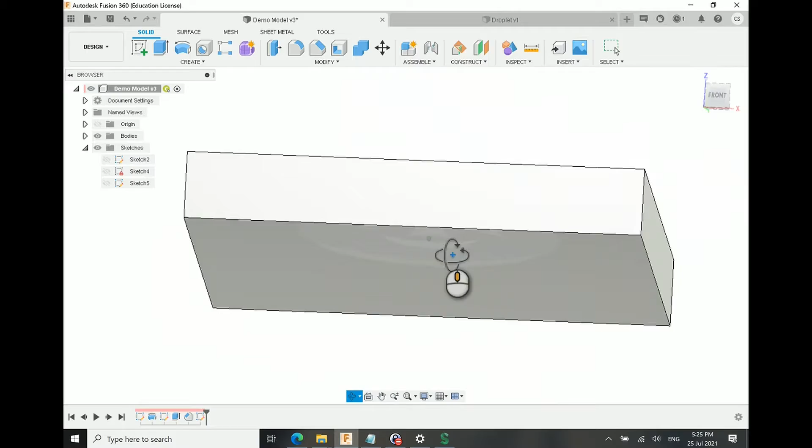This video will go through the complete process of going from a Fusion 360 CAD model to a finished part that you can hold in your hand using the Tormach xsTECH router. So I'll be going through how you create the toolpath in the Fusion 360 Manufacturing Workspace, how you go from those toolpaths to a NC file, so the G code, and then how you load that G code into the

Tormach xsTECH, and then how you set up the machine, like turning it on, setting the work offset, how you install tools, stuff like that. And then going to how you start your program, cycle start. And then also I'll be going through how you do a tool change between two operations, which is something that I have not seen other videos cover. And then I'll be going through some debugging too. So I ran into some problem and I showed how I tried to figure out what's the problem and how to fix it in the code.

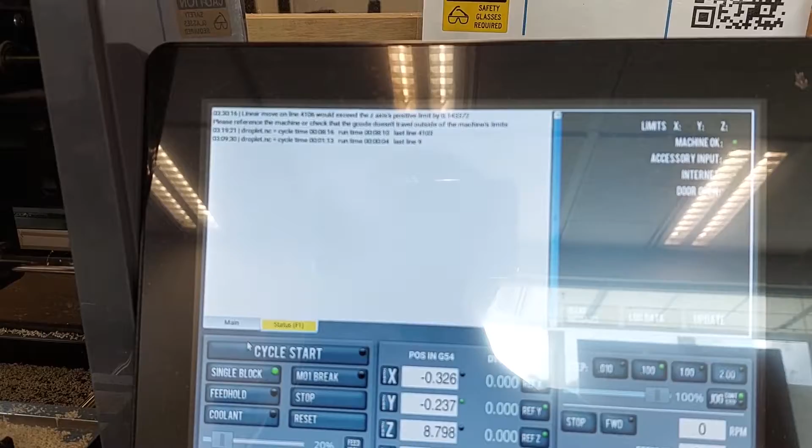And in this video, I'll be kind of focusing on how to run the machine conservatively. I remember when I first started, my top concern was that I'm gonna crash the machine because I'm still really green about the whole process, and I'm not sure when I press cycle start how the machine is gonna move, and I just always felt unsure, so I hope that this video will help make that easier.

This video is quite long because I want the video to cover the entire process, and this is something that I wanted to have when I started, but I couldn't find. But it's likely that you already know some or most of the stuff that's covered in this video, so do skip around, and everything is timestamped, so I hope it will be easy for you to navigate this video.

This is the part that we're gonna make. It's meant to look like the surface of water when some droplet drops onto it, so I have this wavy pattern. And I basically designed this as a demo piece, and it's good because you kind of need two milling tools to make this shape.

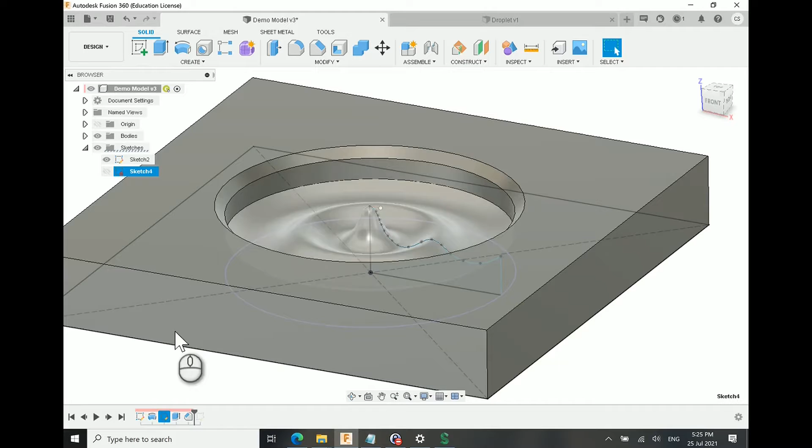Going through the design very quickly. So I'm in the design workspace of Fusion 360. So the first thing I did was to draw a half of the cross section of the part that I'm going to make, so just this wavy pattern, and then I revolve it around to get the solid. Then I drew a sketch of the outer square of the part, extrude that, and then lastly I created a chamfer on the edge here. And there's another sketch here that will be used later in the manufacturing workspace, where I use this sketch to confine the toolpath, but more details on this later.

And so in Fusion 360, once you're done with the design in the design workspace, and you want to make it with a CNC or other processes, then you go to the workspace menu on the top left corner here and click manufacture. So here is the manufacturing workspace. Make sure you are in the milling tab and not the other ones.

On the left here, for example, in the model folder, you can still see the model you're trying to create, and you can still see the individual sketches that you made in the design workspace. And this is useful sometimes because, for example, if I want to confine some toolpath within some geometry, then I can either select it on the model itself, or I can select the sketch itself, which would be easier sometimes. So I'll hide the sketch.

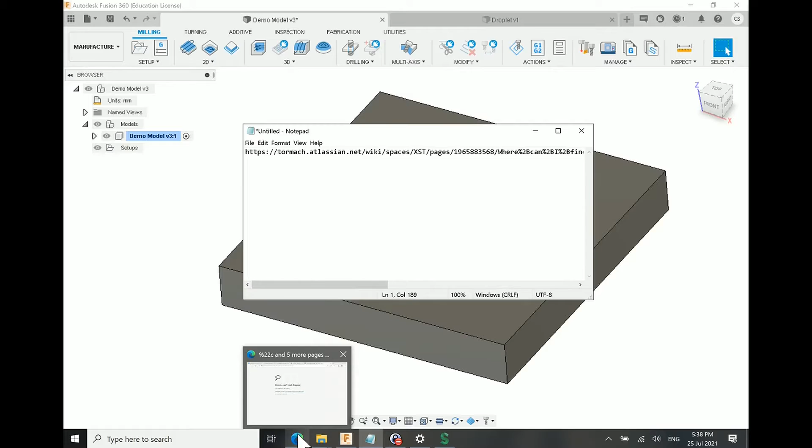Okay, so before we start, we have to import the tool libraries of the xsTECH and also the machine definition. The tool library and machine definition can be downloaded from this link, which will be in the description. So this is the link where we can find the tool library and the machine definition. It's kind of hidden in this weird Q&A section. I don't know why Tormach makes it difficult to find this. So download this folder, and this file.

And once you download, go back to Fusion. And in Fusion, first we'll import the tool library. So go to tool library. Once the page finished loading, you see something like this. Yours will probably look different because it depends on what you have open and what you used before. So on the left, go to local and right click on local, and then press import libraries. And then this window will pop out, and just go find your tool library folder.

So in my case, the tool library is in my download folder, and just press this and click open. But I've already imported it before, so I'm not gonna press open here. And once you're done, you should see this tool library under the local folder, which is the xsTECH Fusion tool library, and it will include the definition of the tools for all the tools that came with the xsTECH. And then now you close this window.

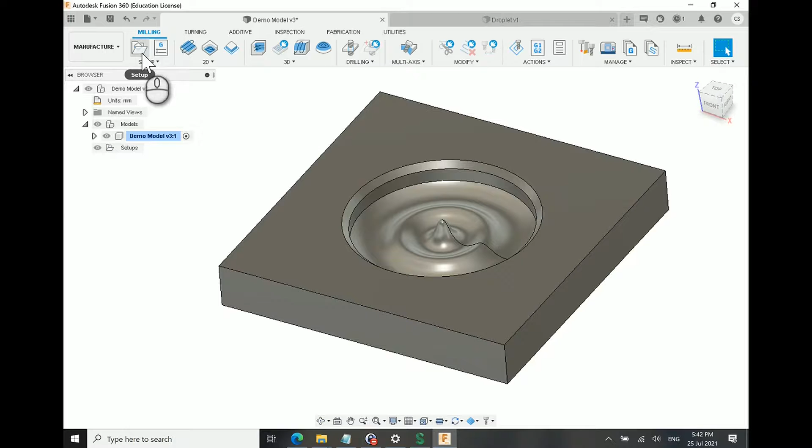Now that we have imported the tool library and the machine definition, we'll start working on the toolpath. The first thing I would do is to create a setup. Go to the top left corner and press the setup button. And then the first thing to do is to select your machine. So go to select, and then go find where you imported the xsTECH router machine definition. So in local, press this and then click select. And next thing is make sure your operation is milling, and then there's a few more things here, but we'll first go to the stock tab.

So in the stock tab, you are telling Fusion 360 what's the size of your stock. So by default, it's in the relative size mode, and it's adding a bit of extra stock. If you see the yellow highlights, it's what the stock looks like in Fusion 360. So in this case, by default, it added 1 millimeter of extra stock on the side and 1 millimeter on the top. But for our case, we just want to mill out the cavity here, and we're not actually going to make the outside profile. So in this case, I can just do relative size box, but the offsets will be 0.

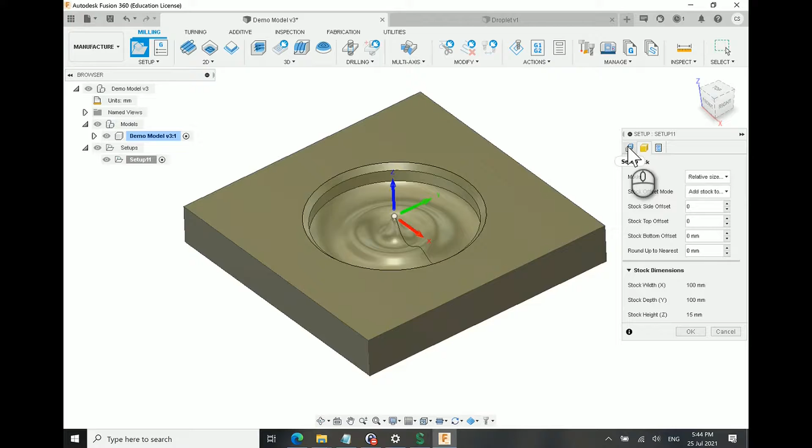And make sure you define the stock accurately. For example, if you want to mill out the outside profile, then you want to make sure the stock definition is correct. Otherwise, the machine might try to move really quickly at some places where it thinks there's no stock. But in reality, if there's actually stock over there, then it's going to be a lot of load on the tool, and you might break the tool. And going back to the setup, now our stock, you can see, is completely aligned. It's almost exactly the same size as our part. And then go back to the setup tab.

Next, we have to define the work coordinate system. The first thing is the orientation. So for the xsTECH, the vertical axis is the Z, the left and right axis is the X, and the forward and backward axis is the Y. So in our case, we do want to clamp the piece in this orientation, so by default, this one is correct. But for example, if we want to clamp the piece vertically on the table, for example to drill some holes on the side here, then what you do is redefine this orientation.

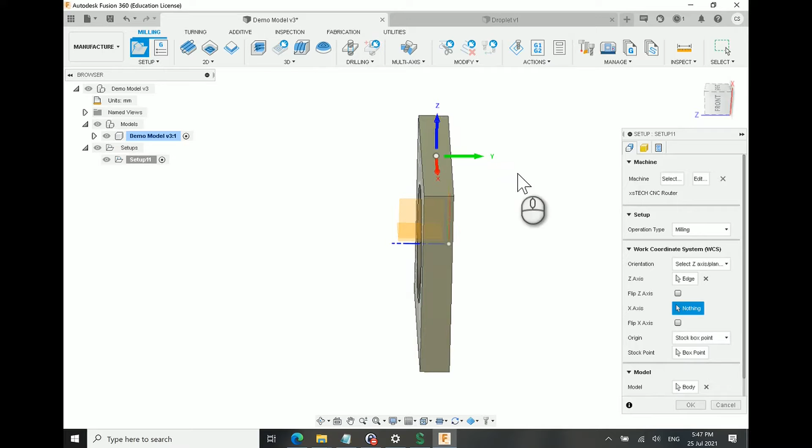By default, it's following the same orientation as your model. So in your design workspace, you have this XYZ here, so it's following that. But you can actually do whatever you want. So for example, if I want to mount the piece vertically sideways like this, then I can choose this option, select the plane and x-axis, and the first thing you choose is your z-axis, and then your x. For example, if I want my x to be the left and right from this orientation, I press here, and I can flip it, and then I've redefined the orientation of my work coordinate system. But in my case, I just want to keep the same orientation as the model.

Next, we have to choose where the origin of the work coordinate system is, and by default, it put the origin at the center of the top of the stock, and this will work fine for us.

But in other applications, you might want to put it elsewhere or in some predefined point that you have designed, put in the design workspace. So there's a lot of flexibility in this. But in our case, I want it here.

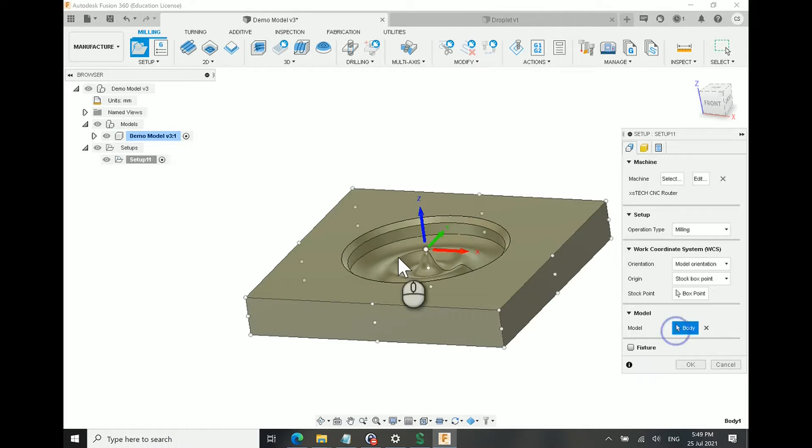And next is model, basically telling Fusion 360 which part you are actually trying to machine out. For example, if you have a component with multiple bodies, but you only want to mill out one body, then here you would choose this body. But since I only have one body, I'm fine with this. And so I can press OK now.

So now at the toolbar, there's a bunch of operations that I can do to cut away material from the stock. So the first thing I want to do is just use a flat bottom end mill to clear most of the material in this cavity away. And I will use a pocket clearing toolpath. I could also use others, but pocket clearing will work fine here.

So first thing you do is select the tool. So click select. Then go to your local folder and choose the tool library that we imported. In this case, I'm gonna choose this tool, which is just a simple flat end mill with product ID 39163, and then click select.

So once you have selected your tool, there are many options and settings that you can play with for this operation. In the first tab, you have your tool that we just selected, and then there's the feed and speed. Feed is basically how fast your tool is moving left and right, forward, backwards, stuff like that. And speed is, roughly speaking, how fast the tool is rotating.

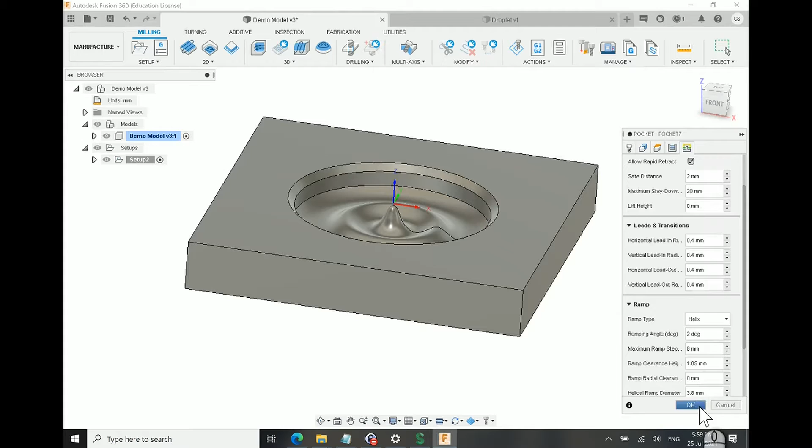And linking, again, we're gonna leave as default. Then I'm gonna press OK. And now it will be calculating the toolpath. So here is the toolpath. You can see the green, blue and red lines, and you can see the tool moving.

If you highlight your operation and press simulate, you can actually see the toolpath, and you can increase the speed of the simulation by holding here. Remember that the speed the tool is moving is not real time, so you can't judge whether a toolpath is too quick or too slow based on this animation. It's just showing you where the tool will go. So you just go through this and see if it's okay.

Usually my strategy is, especially at first when you have so many settings, it's often quite intimidating because you don't know whether you're going to do something wrong. But I find that you can just press OK first and then look at the simulation, and if the simulation looks okay, then usually it won't be too bad. Especially in a material like wood, you have a lot of margin for error.

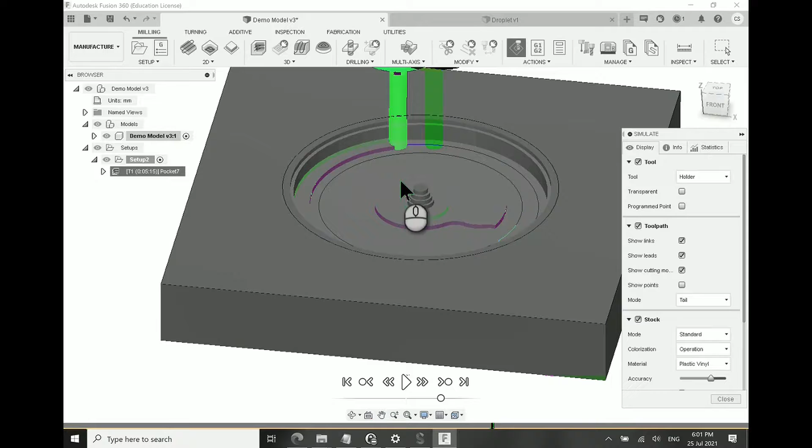So if the toolpath looks okay, meaning it's not suddenly making some really deep cuts, or the tool is simply at the wrong place, then it'll be okay. The simulation looks good, so I can go back by pressing close.

The next thing I want to do is clean up this wall here. After the first operation, I left some material on the side here, and I want to clean that up. For this operation, I'm going to use the 2D contour toolpath. So go to 2D and press 2D contour, or you can just press here directly. And first select the tool.

By default, it's just going to use your previous tool. In this case, I do want to use the previous tool, so I don't have to reselect it. And for feeds and speeds, it's also going to inherit your settings from before. For example, the cutting feed rate is 1500 that we set just now. But in this case, because I'm trying to use the tool to clean up this whole face in one pass, a lot of the tool is engaged with the workpiece. So I want to go a bit slower for this pass. So I'm going to change the feed rate back to 1000 millimeters per minute.

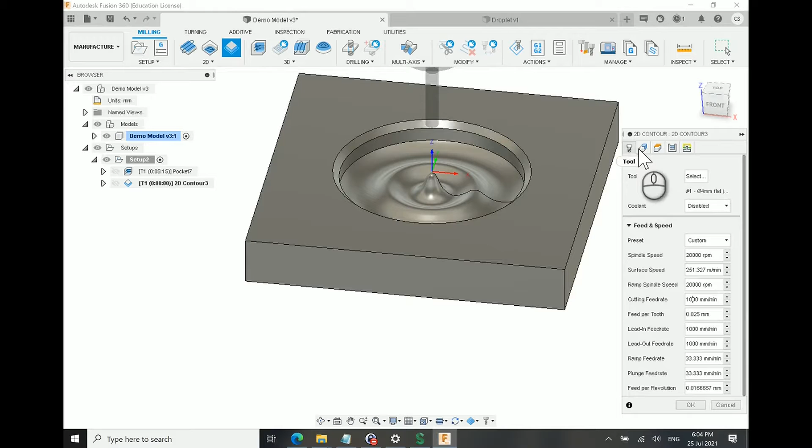The rest, and then the geometry. So basically defining which 2D contour I'm going along. So I'm pressing the bottom of this face. And you can see the arrow here. The arrow right now is inside the contour, meaning the tool will be inside this contour, which is what we want. Sometimes this might be wrong. You can just press on the arrow and it'll mill on the outside. But the default was correct, so I'm going to leave it as it is.

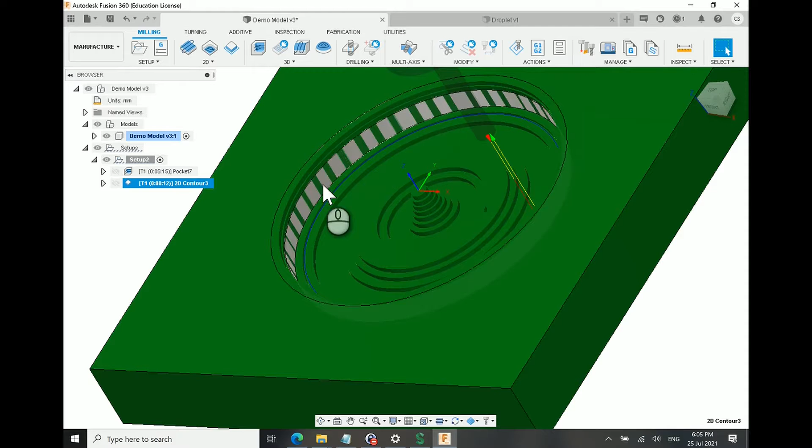The other stuff I can leave as default. Height I can leave as default. And then passes, you can just leave as default, press OK, and then simulate and see whether it looks okay. So you can see this toolpath is very simple. It just goes through in one pass, and on this stock you can see the green is basically your stock, and if you see some gray, you're seeing your model, and when you see this kind of pattern, it's showing that your stock, at least at this face, is matching with the model itself.

If we go to simulate, and if we slow it down, you can see it going down and then just going for one pass. So again, if I'm not very confident with my settings, I can just go to simulate and carefully look at this whole pass, and I can see that the whole time it's not cutting some ridiculous slot or having a lot of engagement. And then I feel confident that this will be okay. Okay, and then we can close this.

So now with the flat end mill, we have roughed out most of the material, and we'll now use a ball end mill to smooth out these surfaces so that it actually looks like our design. For smoothing out this geometry, we'll use the spiral toolpath. And then we want to use the ball end mill, so we have to select a new tool. Again, go to your xsTECH Fusion tool library under local, and you can go find your ball end mill.

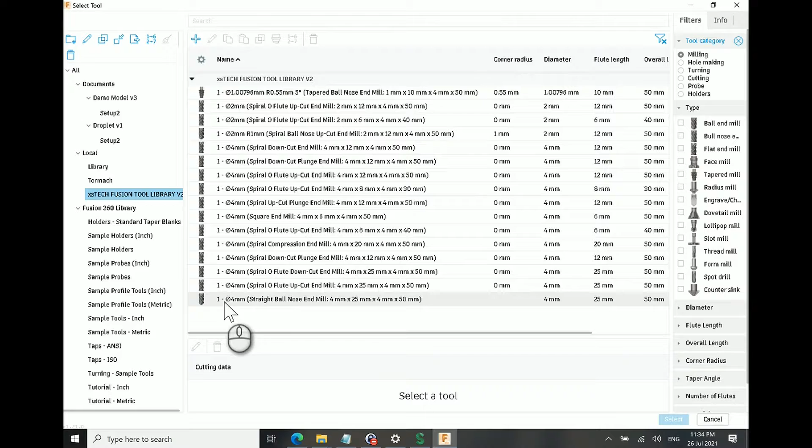I think there's an error with this Fusion library, so make sure you find this tool, which is number 39166. The Fusion library itself doesn't list it as a ball end mill. So if you click ball end mill here, it wouldn't show up. This 4mm ball end mill is only showing up because I changed it. So what you have to do is right click and then edit tool, and then at the cutter, change the type from whatever it was, probably the flat end mill, to the ball end mill, which I've already done here. Once you're done with that, again, it's tool 39166, and then choose select.

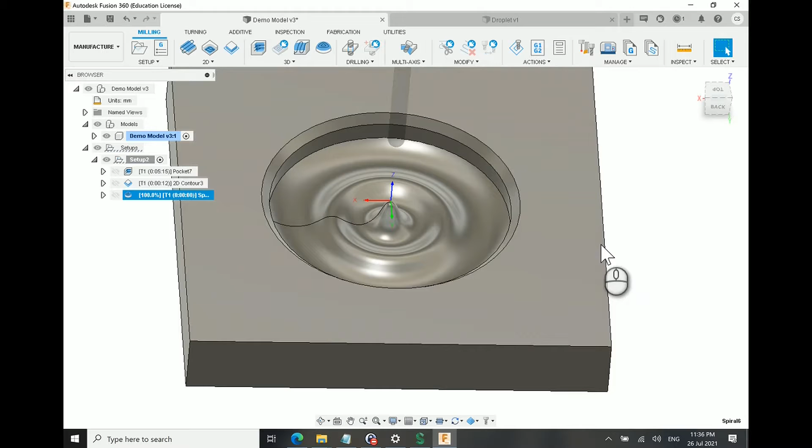With these toolpaths under the 3D section, oftentimes you can just press OK first and look at the toolpath, and you'll know what setting you have to tweak. So I'll press OK and wait for the toolpath to generate. This is the toolpath that Fusion generated, and if we look from the side, we can see that the passes are quite far away from each other. So the surface is still not as smooth as we would like, so we know we have to adjust the stepover.

So we'll go back into the spiral toolpath to edit, and we go over to the passes tab. The current stepover is 2mm, and I've done this so I know that 0.5 will work well. I also want to change the speed because it's just a ball end mill and most of the material is already roughed out, so we can actually go faster. So I'll set the cutting feed rate to 1500 millimeters per minute and press OK.

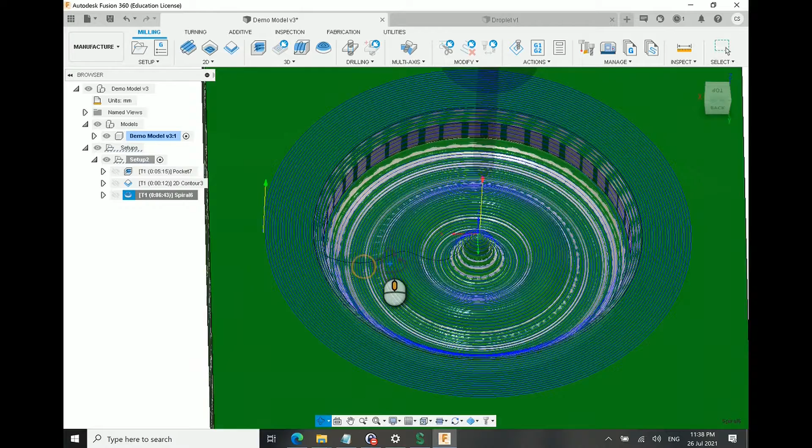So the one thing I noticed is that it's doing many of these passes on the outside that are not actually cutting away any material. So we'll go back in and press edit. And then under geometry, for machining boundary, we're gonna change from silhouette to selection. And for the selection, because we want to confine the toolpath within this cavity, I'm just gonna select the most outer edge of this cavity, and the rest I can leave as the default.

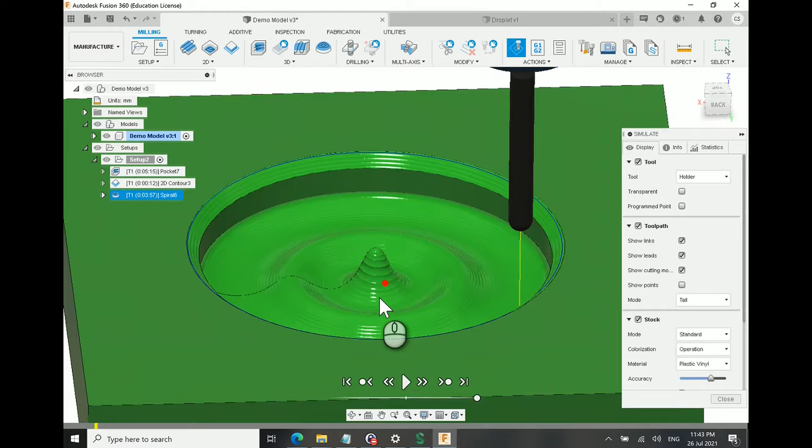So now the toolpath is almost really good, so I can go into the simulation and have a look. And so in the simulation, it's running through this. So after the simulation has completed, we can see that most of the surfaces are quite smooth, except for the center where that tip of the water is. And at that part, the step over lines are quite obvious. Mainly because probably the spiral toolpath is stepping over horizontally, so at this section where you have a steep angle, the step over line becomes more obvious.

To solve this problem, we'll do the surfacing with two operations. The first operation will just surface the center where the water is, where the part is quite steep, and the second operation will surface the rest of the cavity. So the sketch I showed earlier is for this purpose. Sketch 5 in this case is just a circle in the center of the part that's not even defined. But it represents a boundary of the steep section of the part. And we'll use this circle to confine our toolpath.

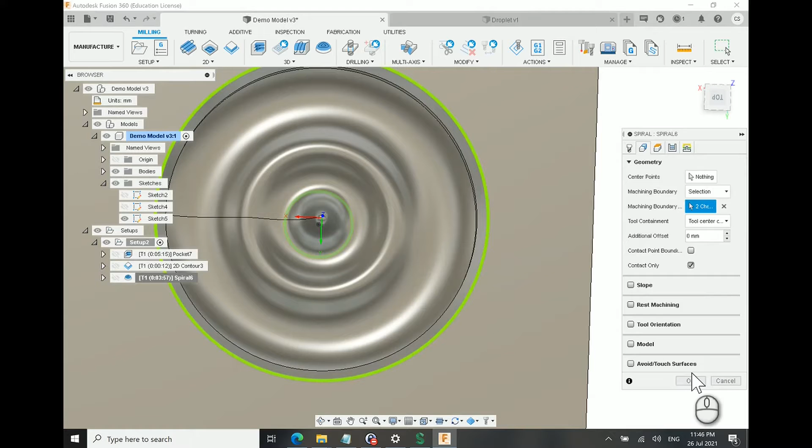So back at our toolpath, at the machining boundary, we'll select that sketch. And now the toolpath will be confined between the two circles. So now the toolpath has generated, and we can see that the toolpath is surfacing everything except for the center steep section. So the center will keep the staircase pattern for the next operation.

Then we'll create the next spiral toolpath. We're going to use the same ball end mill as the previous operation. And for speed, it's going to be 1500 as before. Then we'll go to the geometry tab, and for machining boundary, we are going to choose selection, and then we'll choose the circle in the sketch that we defined in the design workspace, and that will constrain the toolpath within that circle. And then the step over, we have to reduce it. Before it was 0.5, and now we're going to change it to 0.2, and then we'll press OK.

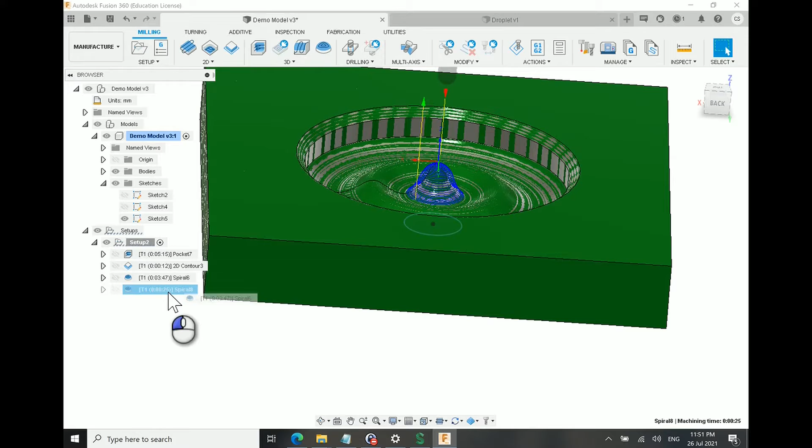And we can see that this new toolpath only machines the center area with a smaller step over. And from the simulation, we can see that it creates a smooth surface even at this steep section. Here I'm switching the order between the two spiral operations by dragging. Because the spiral operation by default will machine from inside out, changing the order like this will make the toolpath smoother, although it's not really necessary.

If we look at the name of each operation, at the start there's a T1 for each of the operations. That represents that Fusion thinks that each of these operations is using tool number 1, but we know that we're using two different tools. The first tool is a flat bottom end mill, and the third and fourth operations use a ball end mill. So to solve this, we'll go into the tool library, go to the setup that we were working on. In this case, it is the demo model v3 setup 2. And here we can see that both our tools have number 1.

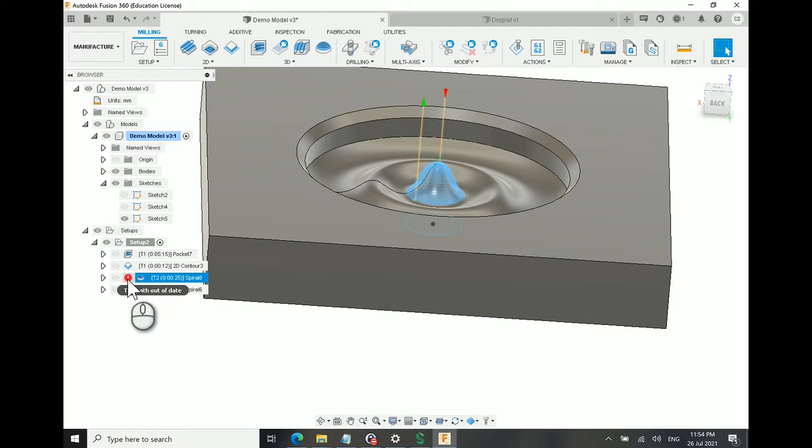So what you do is just select both by holding Control, pressing one and holding Control, and then pressing the other one. And then click this button, renumber. By default, it will change the first tool that you added to tool number 1, and the second tool you added to tool number 2. So the default will be correct, and you just have to click renumber and click OK. And now you can see that the first two operations use tool 1, so it says T1, and the second two operations use tool 2 with the number T2. Now just regenerate the third and fourth toolpaths.

And lastly, we need to post the toolpath, which will generate a file that the Tormach xsTECH can read. So make sure you have selected the setup and then click post process. And under post configuration, by default, it should be the Tormach PathPilot / Tormach. This is selected by default because we have selected our machine definition to be the xsTECH router. And then choose a place where you save your NC file, then click post.

And save it to a USB. For this demo, I'm just going to save it to my desktop first. And then Visual Studio Code will show up by default, which will show your G code. And here's a tip from NYC CNC. Just check that in the first few lines you can see your T1 and T2, which shows that this code is using both the tool 1 and tool 2. It's just a way to check that you have posted all the operations and not just accidentally posted one.

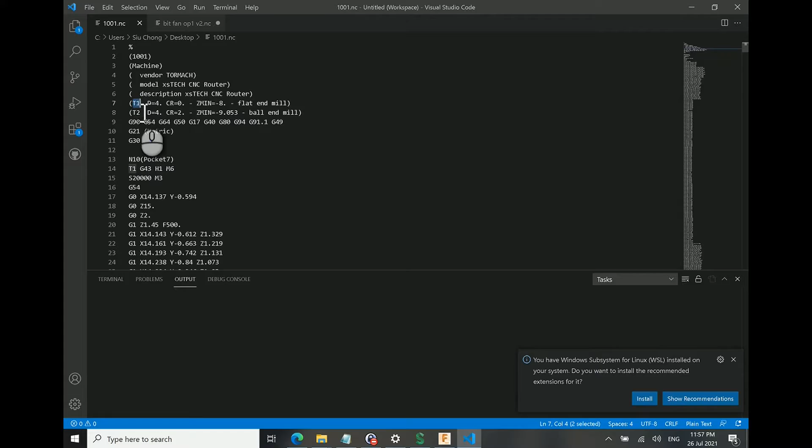Now you can just close this and then eject your USB and then plug it into the xsTECH router. First, I assume you have everything hooked up, the machine, the controller, keyboard and stuff. And the first thing to do is to power on. There's a switch at the back here. And then the controller screen will turn on. And you just have to wait for it to get ready.

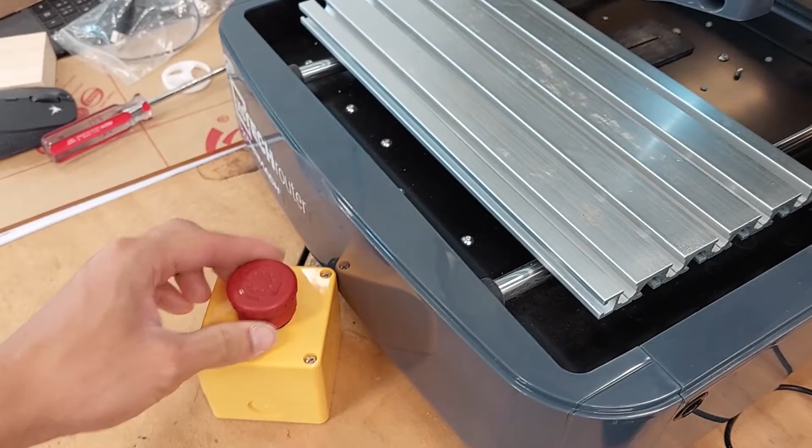Now that the boot up has completed, we'll first reset the machine. We have to first make sure that the E-stop is not pressed. So undo the E-stop by twisting it so that it's in the up position, and then you can press reset. So once you press reset, make sure that there's nothing on the table, because we're gonna reference the 3 axes. And when we reference the 3 axes, it's gonna move. So if you have stuff mounted, it might hit it. So make sure it's empty.

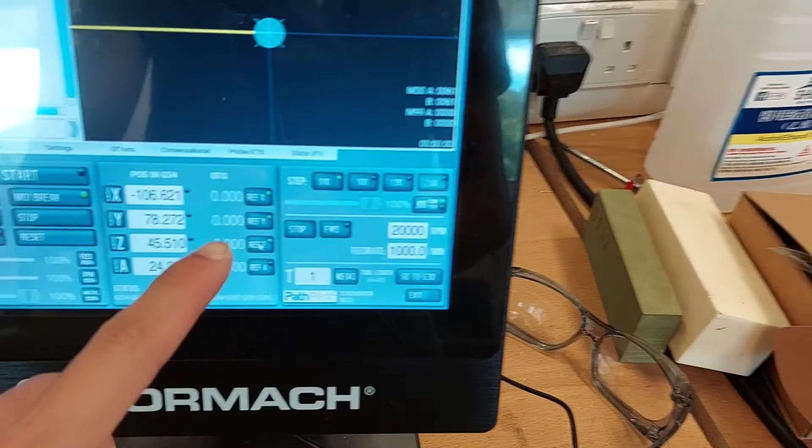And then click reference all 3. And then the machine is gonna move itself into the limit switches, so the machine knows its own coordinate system. And once you have referenced, all 3 of these lights should turn green on the ref X, ref Y, ref Z buttons.

To move the spindle of the machine, we can use the shuttle. There are the X, Y, Z buttons, which help us select which axis we want to move. For example, if I press X, then I'll be moving the X axis of the machine, which is in this direction. So I can move by turning this dial, and clockwise is positive as labeled here, and for X the positive is in this direction. And then I can move other axes. For example, if I move the Y axis, I'll press Y, and then I can again turn this dial, and I can move the Y axis. And with the Z axis, the spindle will come down. So here you can see the spindle come down.

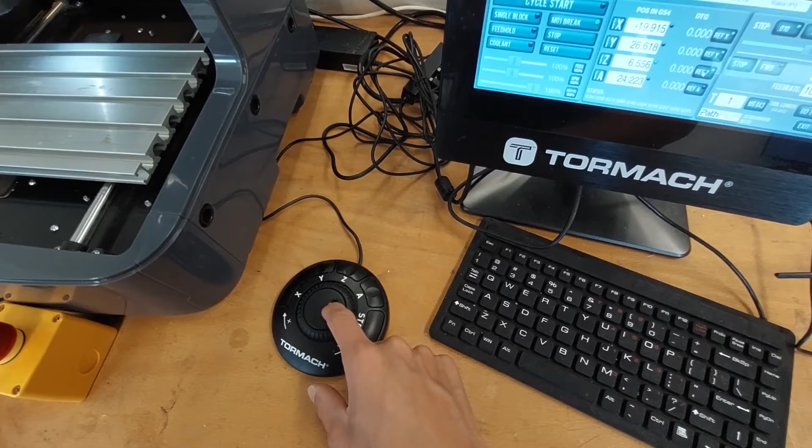Besides using this, you can also use this hand wheel to turn a specific step. To determine the size of that step, you go to the screen and you choose this step. So right now, the 0.01 is highlighted. That means every click here will move the axis by 0.01, and I can increase the step size, for example, to 2, and then I change the axis to X, then every click here is gonna move the machine by 2 millimeters.

Next, we'll install the stand for the electronic tool setter, or the ETS. This will be used later to set tool length. I'll move the table to a comfortable position so I can put it onto the table. Install it roughly in this position and make sure the spindle can actually reach the center of this point, because I think the spindle cannot reach the end of the table. So I'm gonna just check that. So yeah, I can confirm that the spindle can indeed move over here.

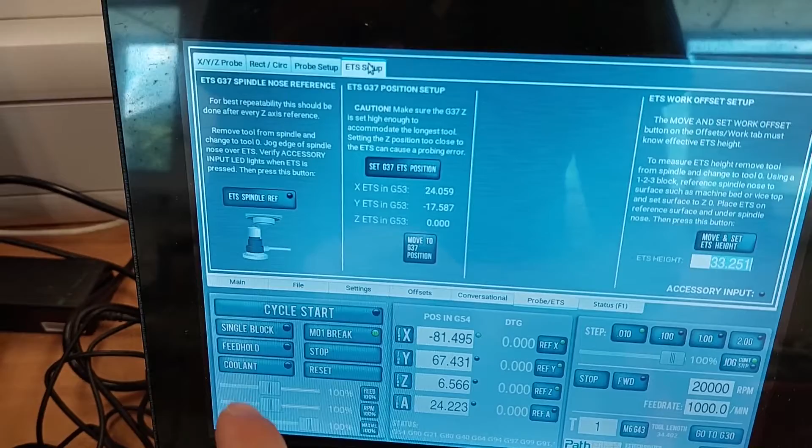Now we go back to the controller and go to the Probe ETS tab. And then up here, go to ETS setup. So the first thing we do is we have to reference the spindle nose. So just basically read this and follow the instructions. We have to move the edge of the spindle nose up to the electronic tool setter. So now using the jog shuttle, I'll move the edge of the spindle nose up to the electronic tool setter where the button is.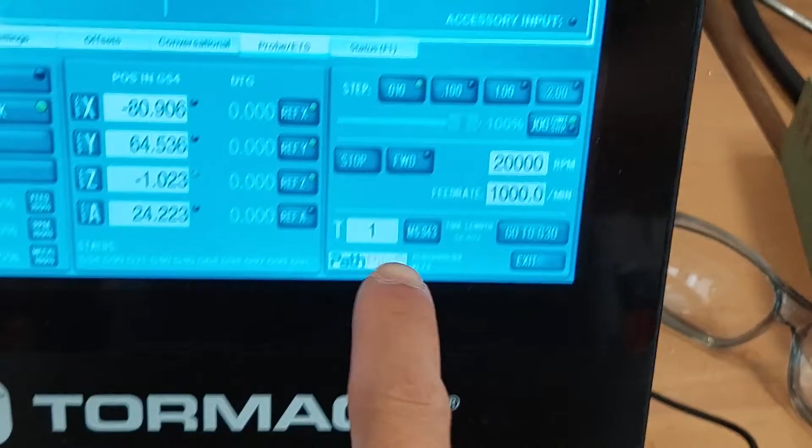So just get the edge of the spindle nose roughly above the button. And now we'll press ETS spindle reference. First we have to make sure we change the tool number to 0. Okay, now the tool number is 0, and then we have our spindle nose above the electronic tool setter. Then we can press the ETS spindle reference.

So if I press the button now, by doing this, we let the machine know where the Z position of the ETS is relative to the machine coordinate, which is important later when we also use the ETS to set the tool length.

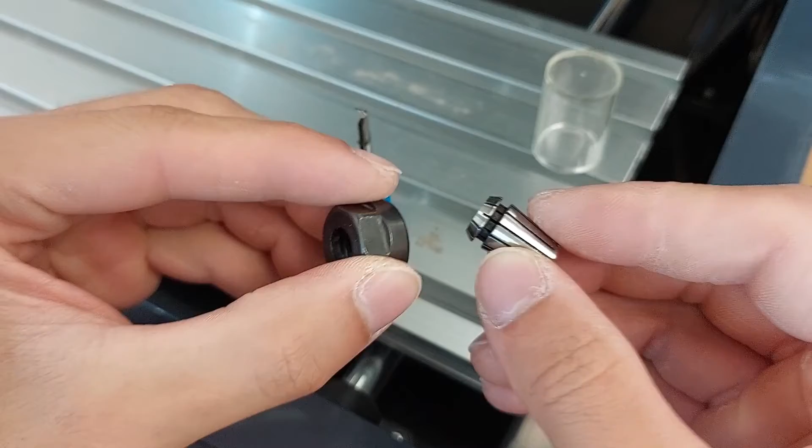Next, we'll install the tool. The tool will be installed into the collet. So we're going to be using a 4mm tool, so we're going to use a 4mm collet. First you have to put the collet into the collet nut. To do this, you just put it in sideways and then snap it in by pressing down with your fingers. And you'll hear it snapping into place.

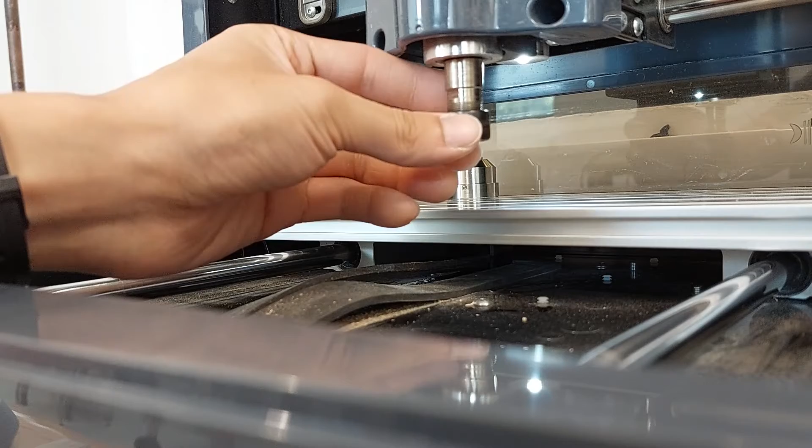Once the collet is installed into the collet nut, we will put it into the spindle. First I'll move the spindle to a position that I can work with easily. I'll bring the spindle down, and now I will screw in the collet with the collet nut. So just put it in and give it a few turns. Turn it until the spindle turns with it, and then just turn back out a bit,

and then we can install the tool. To install the tool, I'll just grab the tool on the shank on the bottom, and then we'll put it into the collet. Just find the center hole and then just push it in. To determine how deep to push the tool in, I like to put it deep enough so that the entire collet is grabbing onto the shank of the tool.

I'm not sure if that's 100% necessary. I think it's necessary, but I'm not sure. But that's what I do. And then you don't want to put it in so deep that it starts grabbing onto the flute. So take it out a bit more. And then also you have to make sure that the tool sticks out enough such that it's deep enough to do the operation that you're doing.

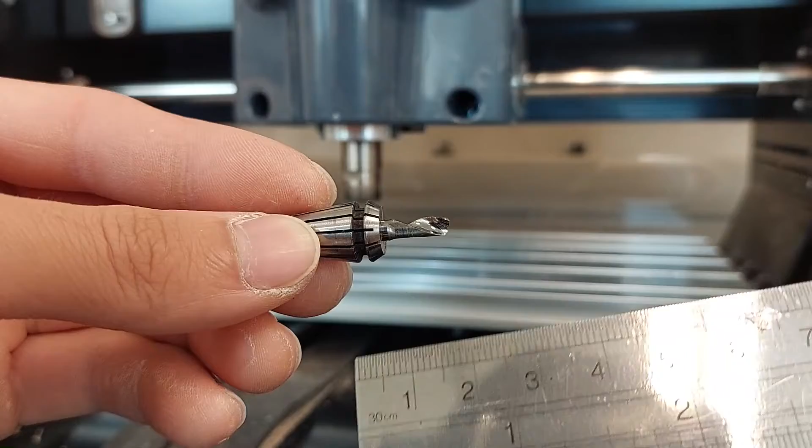For example, if I'm cutting a pocket that is 20 millimeter deep, and my tool is only sticking out by about 13 millimeter, then it's obviously not going to work, because your collet is gonna hit your work before it actually cuts the material. But for this example, I know that the cavity's deepest position is only around 8 millimeter, so this will actually work. But I'm just gonna take it out a bit more, maybe roughly like this when I install it.

So once I'm happy with how deep I put in the tool, then I'll take the two wrenches that came with the machine. There's a big wrench and a small wrench. The big wrench goes to the collet nut, and the small wrench goes to the spindle. So sometimes you can tighten it by hand a bit first, so things won't move around. And then I'll put the smaller wrench onto the two flats here at the spindle, and the big wrench onto the collet nut, and tighten it.

And this is kind of by feel, but you'll feel that as you tighten, there will be a sudden point when the torque you need to turn it will increase suddenly, and you kind of go to that and you stop. Yep. It's just kind of by feel. It's hard to describe in video.

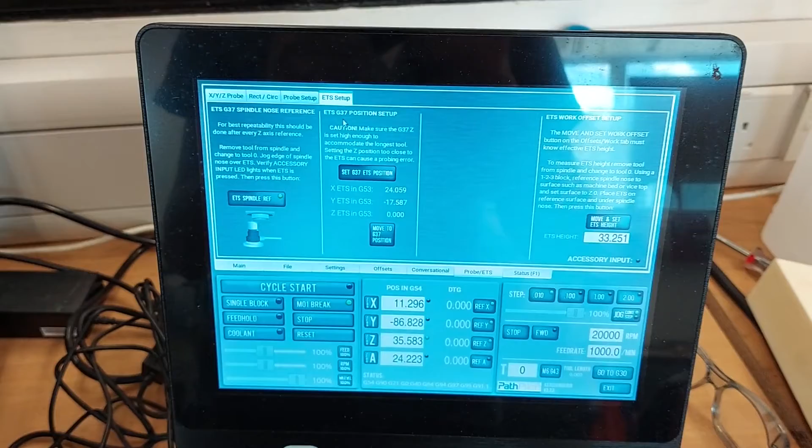Next, I will do this section of the controller, which is the ETS G37 position setup. Basically, I have to tell the controller, every time I want to set a tool length, where the spindle should move to. And then once it moves to that G37 position, it's going to come down and touch the electronic tool setter. So first thing, I have to move the tool such that it is right above the ETS.

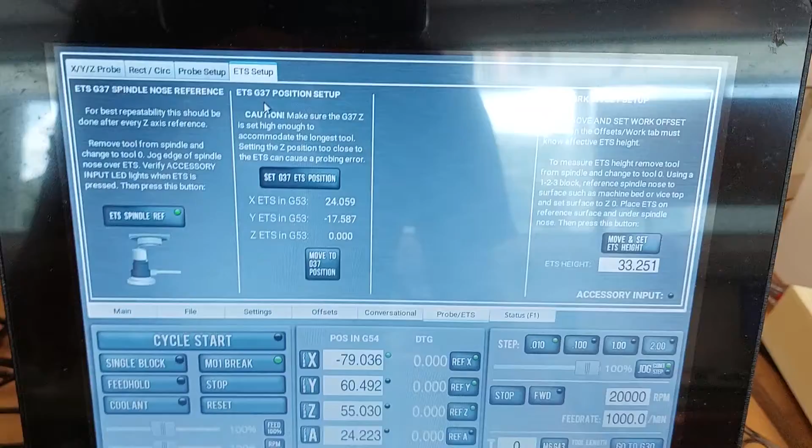So now that I've aligned the tool right above the ETS, the button, then I can go back to the controller, and actually you have to move the tool down such that you can see whether it's aligned to the button. But after you're done, move the spindle back up to the highest Z position. So do that. Just move it all the way back up as high as it goes, and then go to this page and click set G37 ETS position.

Basically telling the machine, okay, right now the spindle is there, and every time you have to set a tool length, go to this position first, and then go down. And then I'll click this button, set G37 ETS position, and it's gonna warn me because I did this before, but click OK. And now it has a new set of this ETS position.

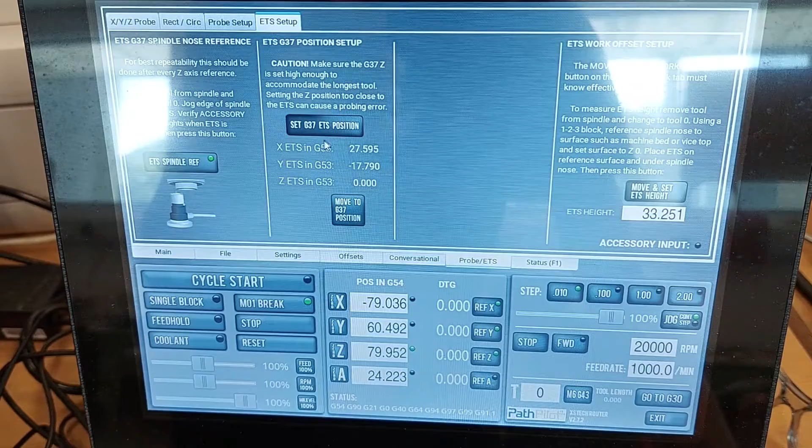Now I'll set the tool length of the first tool. First, I change this T, the tool number, change it to 1. It's 1 because I know the tool that I just installed is tool number 1, and the number is determined in Fusion 360. Each operation there's a tool number, and I know that for my first operation it's 1, so I set it to 1, and then now I go to the offset, and you can see that tool 1 is highlighted, and now I can press move and set tool length.

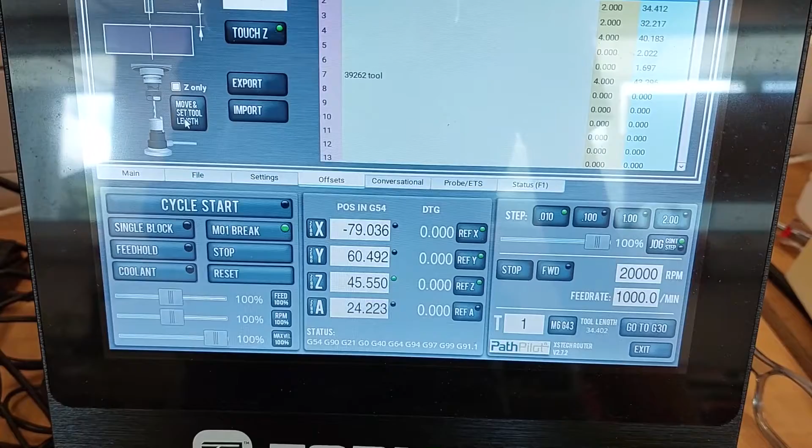So once I press this button, it's gonna move to the ETS position that we set just now, and then it's gonna go down. So I'll focus on here, and the tool is still at the ETS position, so I'm gonna move it away just to show that it will be able to move to that position. So now I'll press this move and set tool length. Once I press, it's gonna move back to that position and come down slowly. And now the machine knows the length of tool 1.

Now we can secure the stock to the table. This is the raw material that I'm gonna use. The dimension is roughly 75 millimeter times 90 millimeter, and our cavity's diameter is only around 60, so there is plenty of space for us to clamp onto the side, and there is also enough thickness so that we won't cut into the table when we clamp onto the table.

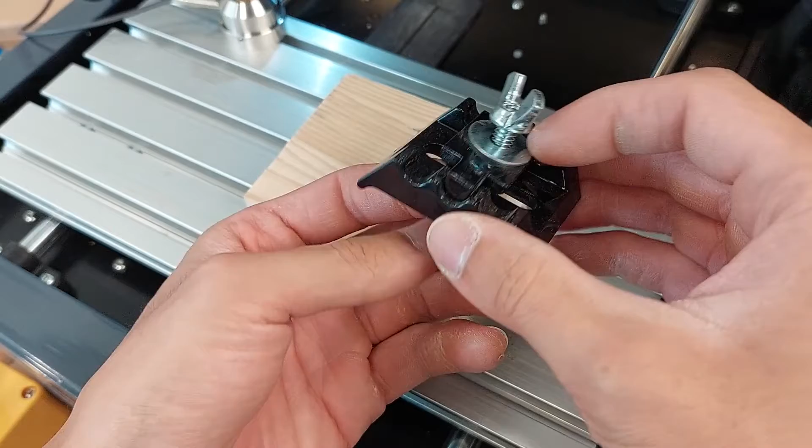And now use the clamps that came with the machine. With the clamp, you put the screw through this big piece, through this thinner piece, and then a washer, and then the wing nut, and then you can slide this hex head into the T slot here from the side. So once it's in, you can adjust the position of this guy to the appropriate one. For this case, the middle one will work well.

So just grab onto it, you just grab on a bit. You don't have to grab on a lot, just a slight bit will be enough. And then tighten the nut, and you can kind of wiggle the screw, make sure the screw is pointing straight down. Now do the same thing for the other side.

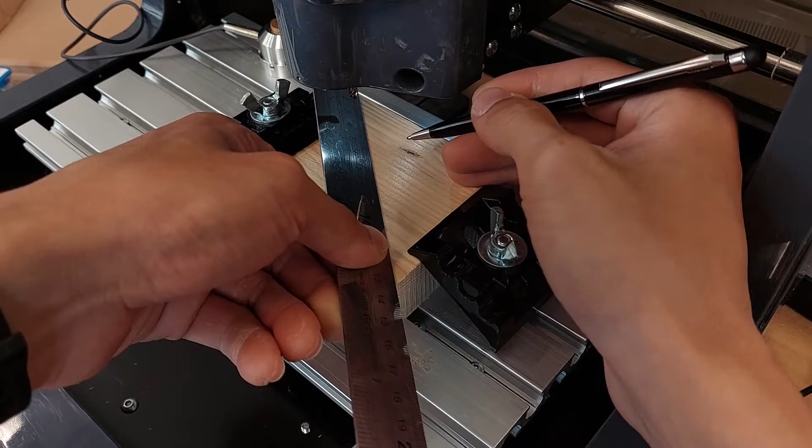That probably could have been easier if I did that before I installed the stock. And now I'll move the tool such that I can just eyeball it, because I know I have enough margin between the clamp and the actual toolpath, so I can just eyeball this. So I'll move the X, Y and Z to almost be touching the cross.

So now I have moved the tool tip. For the X and Y position, I've already moved to the origin that I've defined in Fusion 360, and then for the Z height, I'm still kind of off from the surface.

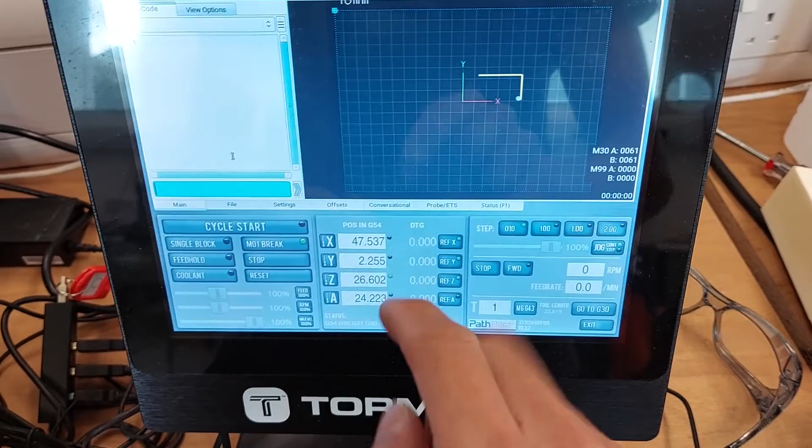So if we turn to the PathPilot, first make sure that you are in G54. And in our program, we also define it to be G54. So G54 is the work offset. Basically, it's one set of coordinate system, and usually everything will default to G54. But just check that it is G54. If it is not, go here and type G54, and then press enter.

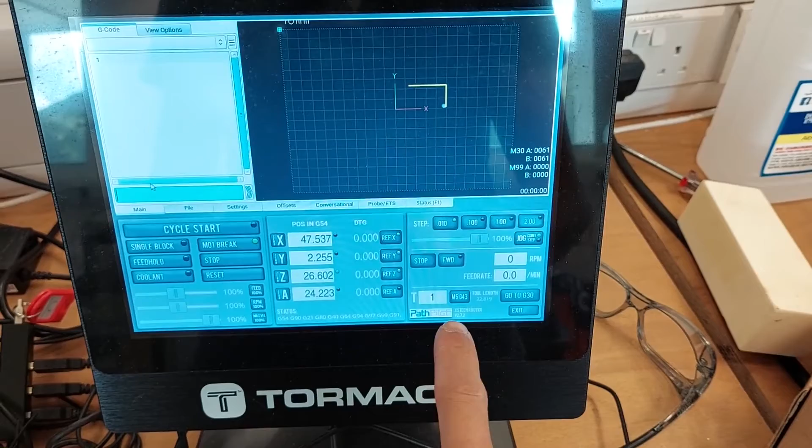Okay, and then also make sure, because right now we're setting the origin with tool 1. So tool 1 is the first tool that we installed. We have to make sure that when we zero out the coordinate system, we are at tool 1, because the controller will take into account the tool length that we have set just now. So it's very important to make sure that it's tool 1 here.

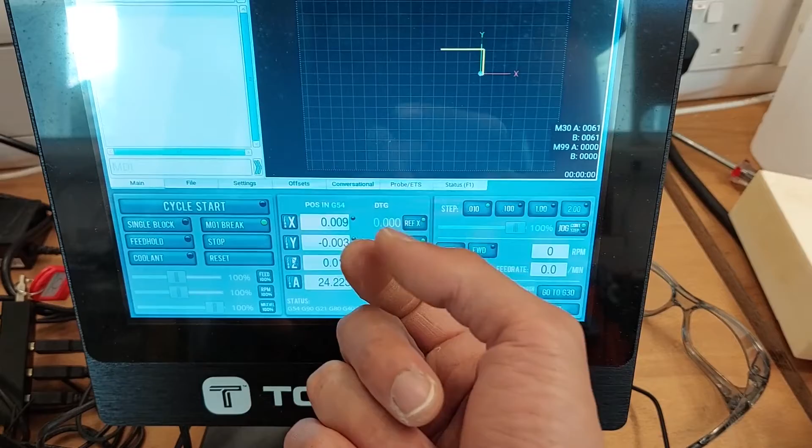And so now I know that my tool is at the origin that I defined in Fusion 360. Right now the numbers are just random, so I'm just gonna zero them out. So 0, 0, and 0. So basically what I've done is I tell PathPilot that the current position is the origin, the 0, 0, 0 position. And you might see some decimal point, 9, 3, 10. Don't worry about that. I think that's just the resolution of the machine itself.

And so now that I've set this, I can move the tool back up a bit. Okay. And now I will load the program. So I've posted the code onto this USB. Now I can unplug it, and I'll plug it into the controller.

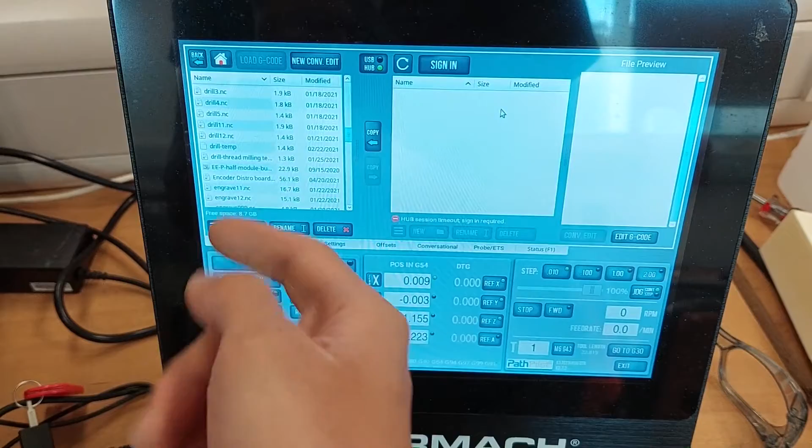Once the USB is plugged in, go to your screen and then go to the Files tab. You were probably at Main just now, so go to the File tab, and on the left side is the file system of the controller itself. On the right side, it's usually a USB. So you have to press here, press USB, and then you might have to plug it in again.

Once you plug in your USB, if it's blank, try to unplug your USB and plug it in again. And sometimes you just have to use a different USB. I've tried many USBs that don't work, but okay, in this case I have it here. Then go find the G code, the NC file that you have posted onto the USB just now. I know it's in this folder, so select the file that you have posted, and now click copy. Once you've copied, go find it in the file system of the controller, and so I find it here.

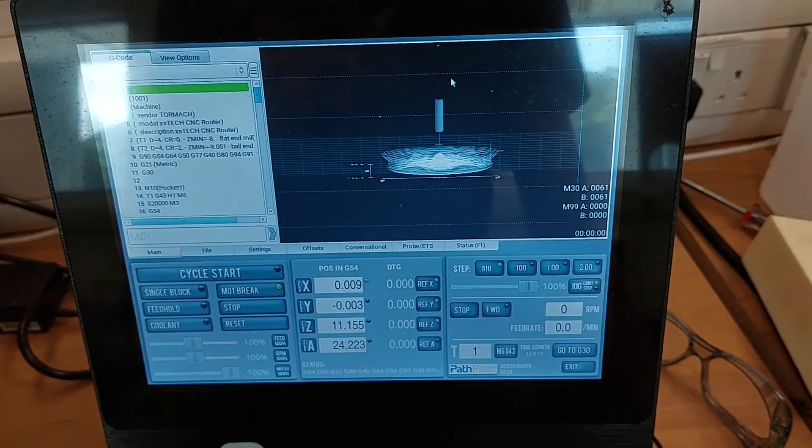And now once you have selected that code, press load G code. Okay, and now it will go to the main screen, and it will automatically show the toolpath here on the screen. And with your mouse or with the touchscreen, you can move this around and see if this is correct. So this toolpath looks like what we have just designed.

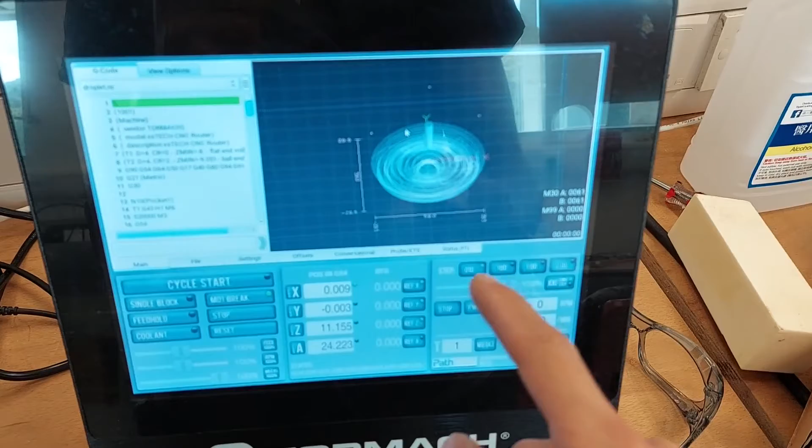Usually I like to set the work offset first before loading the G code, because if you didn't set your work offset first, your coordinate system might be at some random place, and when you load your G code, it could give you a warning saying that you have movement that's outside of the machine boundary, just because the work coordinate system is wrong. So usually just set the work offset first and then load the code. And in that case, if it gives you any warning, then you know it's probably a real valid warning.

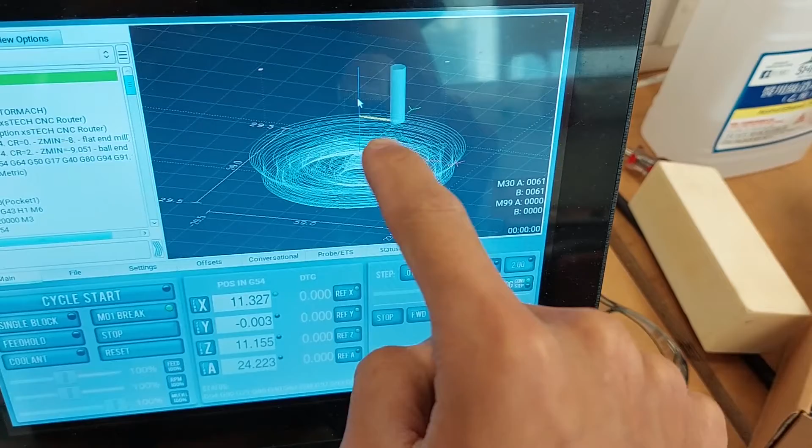Sometimes it might be scary to click cycle start because you're not sure if your code is correct. But there are many ways that you can get a rough check. For example, in this screen, there's the Z, Y, and X. It shows you the coordinate system, and here it shows you the tool. So if I move, for example, the X-axis around, the tool will actually move on this screen. And then you can just move it around and see if it looks correct.

So I know the coordinate system is shown here, and I know that the program right now thinks that the tool is slightly towards X positive, and maybe around a centimeter above the workpiece, roughly, just based on the tool diameter, because the tool diameter is 4mm. You have set that here in tool 1, the diameter is 4.

So this is what the program thinks, and then you look at the actual thing, and I think this looks pretty close to what that screen just showed me. It's slightly towards the X positive position, and it is around 1 centimeter above the workpiece. So this gives me confidence that I have set my work offsets correctly.

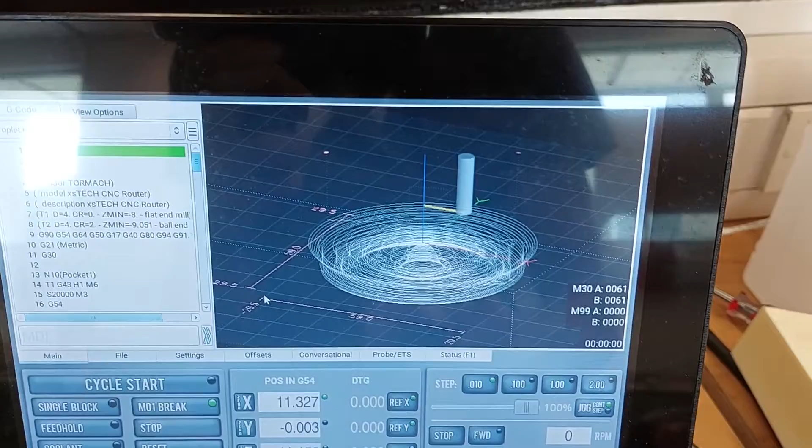Before I start running the program, I like to take the tool setter out, because this tool setter is loose here and it's gonna move around. There are screws to secure it if you want to, but I like to keep it mobile, so I'm just gonna leave it outside of the machine, roughly like this. And I usually just leave the cable on. Now we're pretty much ready to run the program.

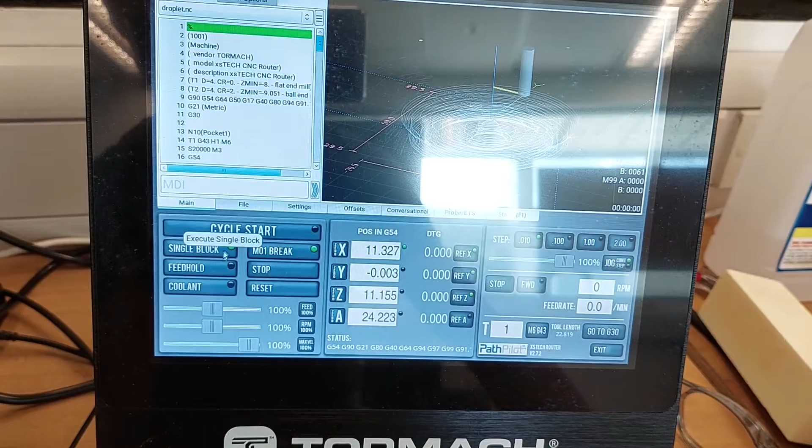So there are a few things that you can do to be slow and make sure nothing crashes. Single block: if you press single block, then every time you press cycle start, it's just gonna run a single line. So when you're not sure about your program, it's good to leave single block on, run the code line by line, and make sure the movement is what you expect. And if something is wrong, it doesn't go wrong really badly.

The other button is feed hold. Basically, anytime the machine is running, if you press feed hold, it's just gonna stop there with the spindle still spinning. So when the program is running and you're scared, just keep the mouse at feed hold. If something goes wrong, just press it, and the machine will stop.

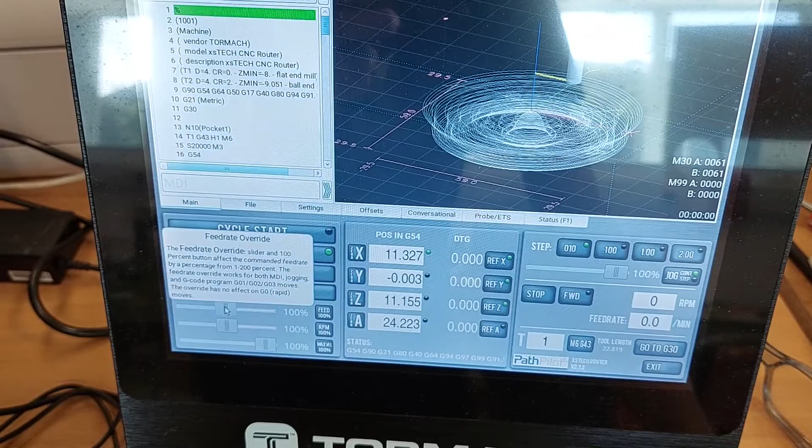The other thing is that you can override feed. So here I can change the feed rate to, for example, 20%, which means that the tool will move at only 20% of the speed you programmed it to go. You can go slowly at the start to make sure everything looks good, and when you feel confident, you can change it back to 100% and run the code normally.

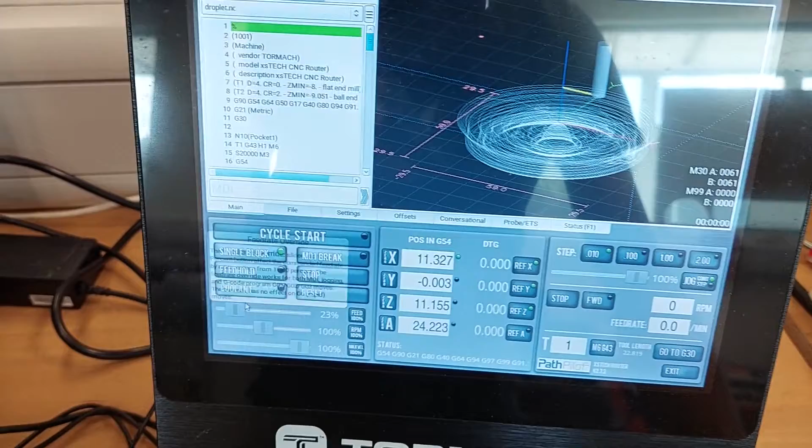So I'm about to run the program, and to be ultra conservative, I'll put on single block, and I will override the feed to about 20%, just so that everything will run really slowly and in control, and I can see if everything is what I expect.

I will also override the enclosure switch just for filming purposes. Usually you have to close the enclosure in order for it to run. I don't recommend this, but for filming I'll do this. So I'll override the switch, and with safety goggles on, single block on and this feed override, I will start clicking cycle start.

So cycle start. Now it's running the first line, and I'll keep pressing, running the next line. The green highlights which line is currently running. Now I just ran the code G30, which I think tells it to go to the G30 position, and now it will start the first operation. So pressing. Now I have started the spindle, and I'm just gonna keep pressing cycle start with my mouse.

At all of this time, I'm looking at the tool and I'm looking at the screen here to see if everything looks correct. Right now I can see that the tool is already really close to the toolpath, and that looks about correct on the machine. So now keep pressing cycle start. Now just slowly moving.

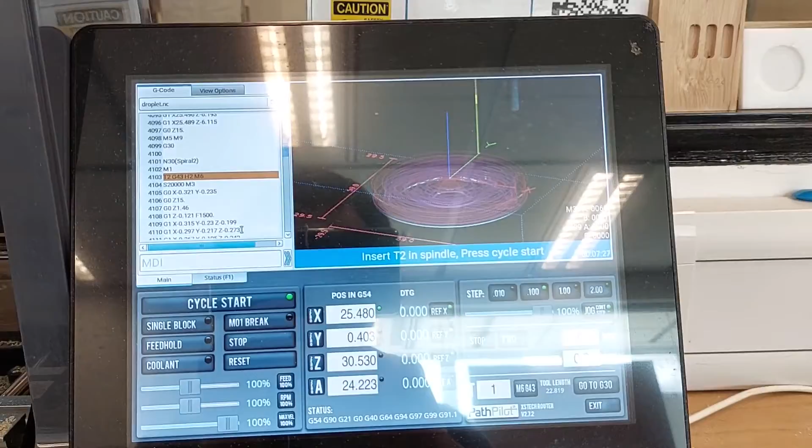So now all the operations with the first tool are complete. And if we look at the controller screen, we can see that it is warning us to change tool 2 in the spindle and then press cycle start. But so far I haven't found a way to actually change it while the cycle is still running. So right now, if I try to use the shuttle, I won't be able to move the spindle.

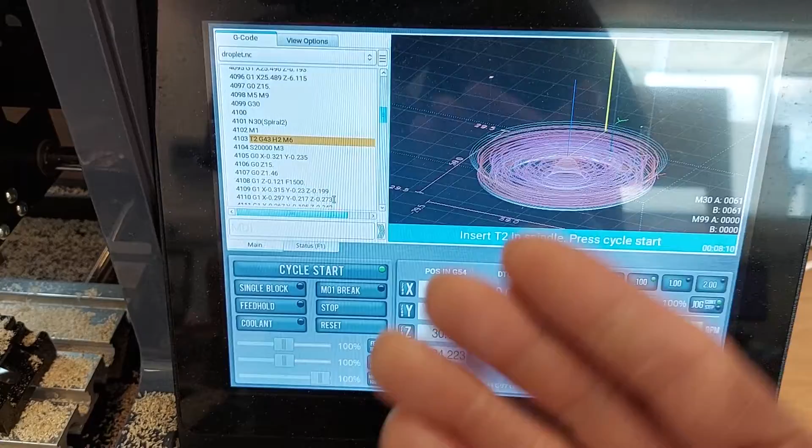So the method I found is that first you remember which line of code you're running. So we stopped at 4103. So remember that or write that down somewhere. And then now you press stop. So you're actually stopping the entire program.

Next I'm gonna actually change. So now that I've stopped the program, I can actually move the spindle around, and then I'm gonna change the tool to our second tool, which is a ball end mill. So now we're using the 39166 tool, which is a 4mm diameter ball end mill.

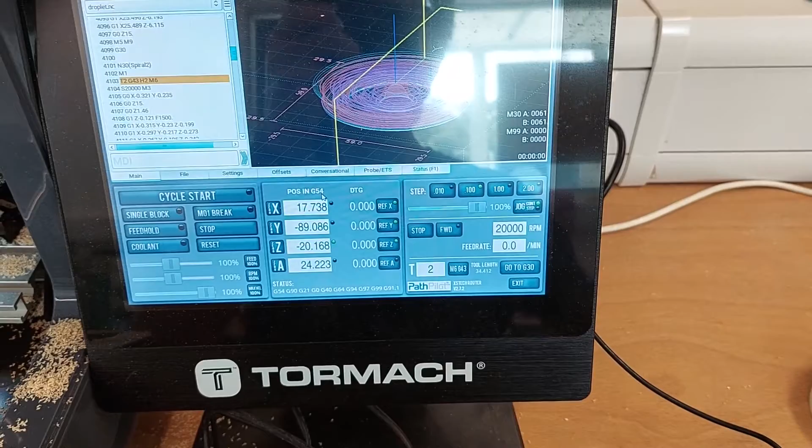So now that I have switched to the ball end mill, I cannot just rerun the program at the line we stopped, because right now the machine doesn't know how long this tool is, so we have to set the tool length again. So first thing, I know that in Fusion 360 I defined this tool to be number 2. So I have to do that first here. So change it to 2. And then enter. And then now go to your offset page.

Let me get better light. So I can change this tool. I know it's a 4mm diameter one, so I can change this to 4. It doesn't actually matter that much, but for the visualization on the screen, it will be better. So change this to 4. And then tool length I don't know yet. First I want to move the tool roughly close to where the tool setter is.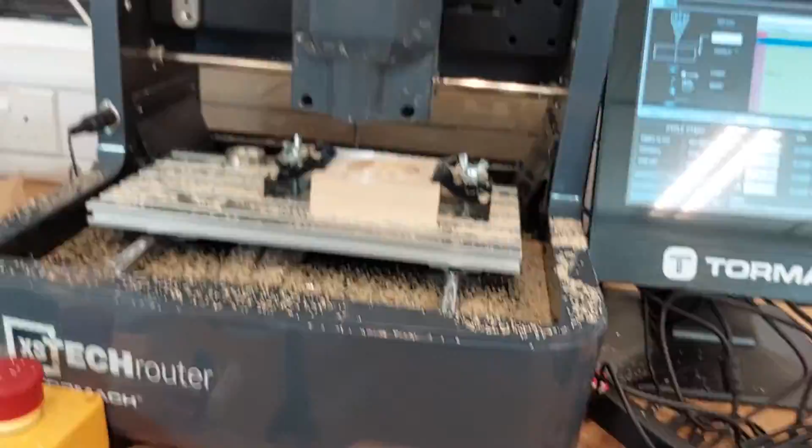So the reason why I like to manually move the tool somewhere close to the tool setter first, instead of just pressing move and set tool length, is because oftentimes these clamps are actually higher than the tool tip. So if we look at it from the side, you can see that the tool tip, even though I already moved it pretty much all the way up, can still hit the clamp. So if you just press move and set tool length, it could move in a straight line, hit one of these high points, and break your tool. So move it somewhere close to the tool setter first.

Okay, now that it's close, we have to put the tool setter back onto its stand. But you can see that there are a lot of wood chips here. So if we put this on right now, it's gonna affect the height of the tool setter, and basically the measurement of the tool length. So we have to clean out the chips either with a vacuum or whatever. I'm gonna use a vacuum.

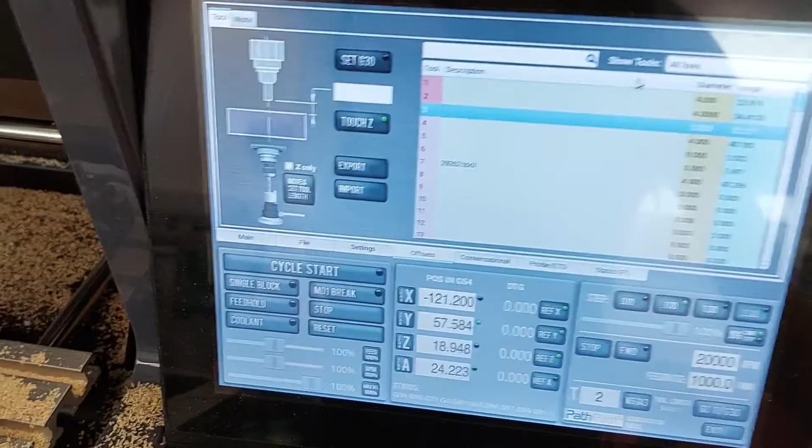So now, again, verify that you're at T2. Let me just deselect this. Just press enter. Okay, so press T2 again, and then click move and set tool length, verify that you're at T2, and then press. So now the machine has just updated the length of T2. And we're almost ready to go back to running the program.

So I'm moving the tool back to somewhere close to where I'm doing my work, because if I start the program again, it might run over some of this stuff, especially with this tool that is relatively long. Just be safe and move it closer to your work, so that when it moves, it won't hit one of these clamps.

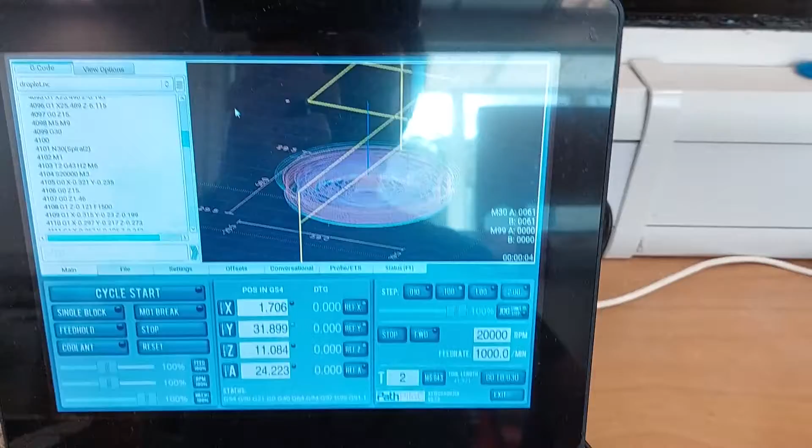I also like to do kind of a sanity check, basically checking whether you have set your tool length correctly. So we know that this surface in our work coordinate system is the 0 height. So I'm gonna move the tool somewhere close to the height of the stock, and then check from the program whether the tool is near the 0 position. So I'm gonna move the tool down.

Such that it's almost touching the 0 height, and I'm gonna go to my program and see if that looks correct. So here is my tool, and my Z height, Z0, is right here at the bottom of the blue line, and that seems to look correct to me. Okay.

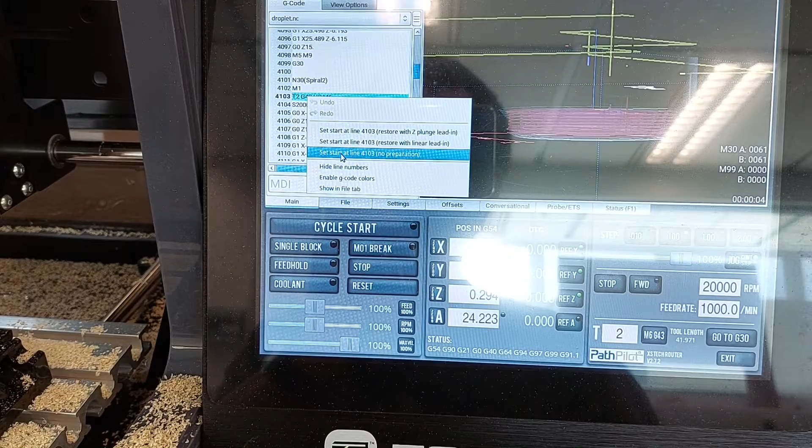And now I have to go back to my line from before. I know that line is roughly 4103. So I go back to 4103, right click, and usually you can just say start at line 4103 with no preparation. Otherwise it will add some extra toolpath to go in, but I know this is between two operations, so it's safe for me to start with no preparation. So now this is highlighted green, showing that if I press cycle start now, it's going to start from this line.

So I'll move the tool back up a bit first. Move it roughly to the working area, and then again I can do single block, and override the feed to be slower. Just make sure everything is running as expected at the start first. So now I'll focus, and then press cycle start. So, cycle start. Oh.

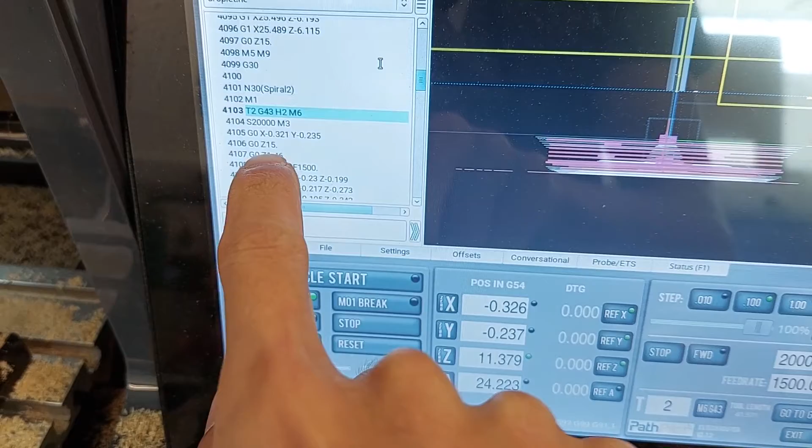So it just gave me a warning saying that the linear move on line 4106 will exceed the Z-axis position by that amount. So I will investigate. So I found out why. The warning it gave us is for line 4106. If we look at 4106, it says G0 Z15. That's basically telling the machine to go to the Z15 position.

But right now, I've already stopped the program, and if I move the Z height, right now I'm moving down, and if I move up all the way, it's at the highest position the machine can go, at the limit. You can see that the Z height is only 11.379. So basically it's not able to complete this line Z15 because it has hit the machine's physical limit.

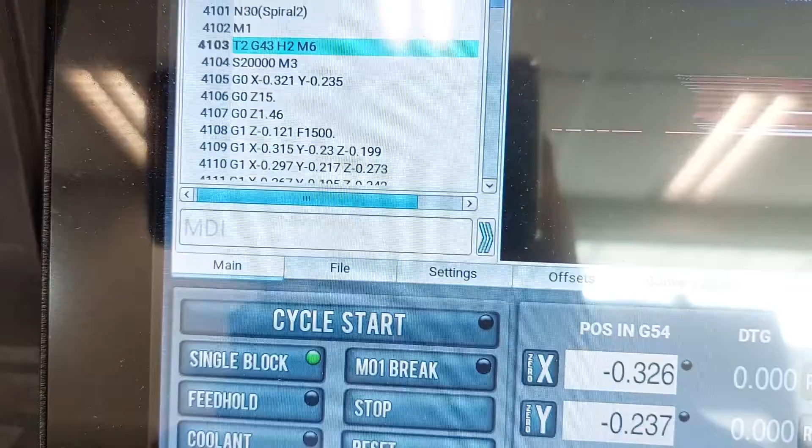So that's one solution, but I know this won't work because I've already installed the tool pretty much all the way in. So what I have to do is adjust the program in Fusion 360. There are some heights that you define, in terms of how high it goes when it's just moving around. And I know the machine is physically capable of doing this operation because right now the tool is already higher than the workpiece. So it's not like my work is over the limit of the machine.

So I just have to go to Fusion 360, adjust the code a bit, post the code again, and then rerun it. So I'll go to Fusion and fix that. So if we look at the toolpath, if I highlight them all, some of these yellow lead-ins and lead-outs are probably what's causing the trouble, because these are relatively quite high and causing the machine Z limit to be reached.

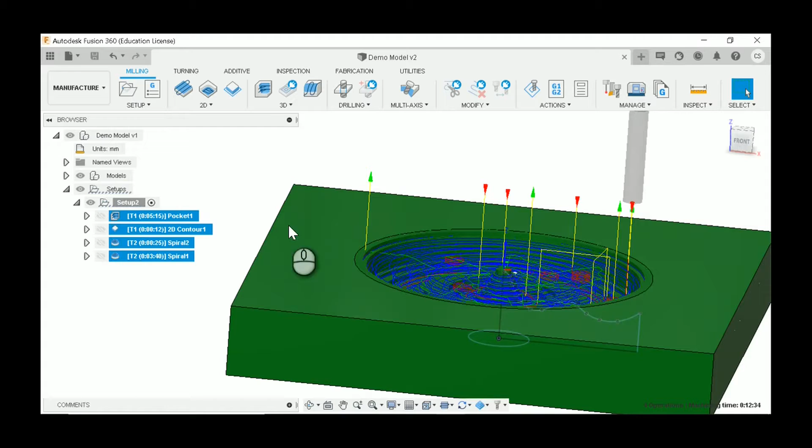And so we can actually go in and fix them. So let's look at the first operation first. Look at the operation, and it's going to be in the heights tab. And so yeah, here's the problem.

You can see each of these heights has a value, and this is relative to the work coordinate system that you have set. In this case it's this coordinate system, and you can see that the clearance is at 15 millimeters, and we saw just now that our limit was actually 11.379. So this is what's causing trouble.

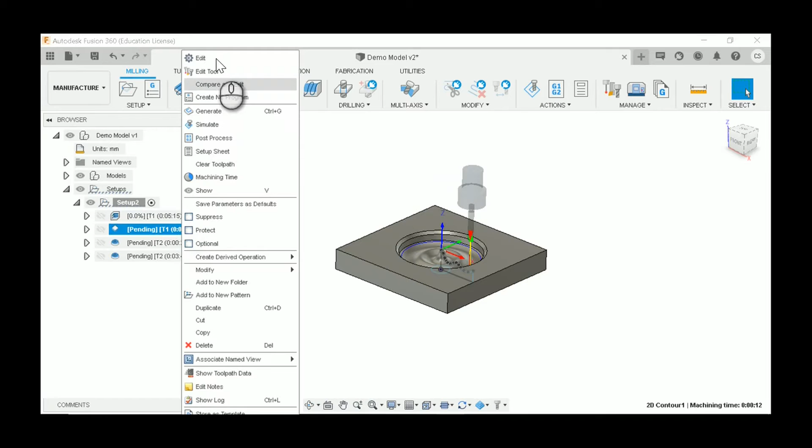So I can just drag this down. I'll drag it until it is less than 11.389. So that's okay. And then the same thing for this. Clearance height. This one's 15 also, so drag it down. I'll just drag it around. You can also set the value here, but because it's not the exact value, it doesn't really matter that much. You just have to be lower than what your machine limit is.

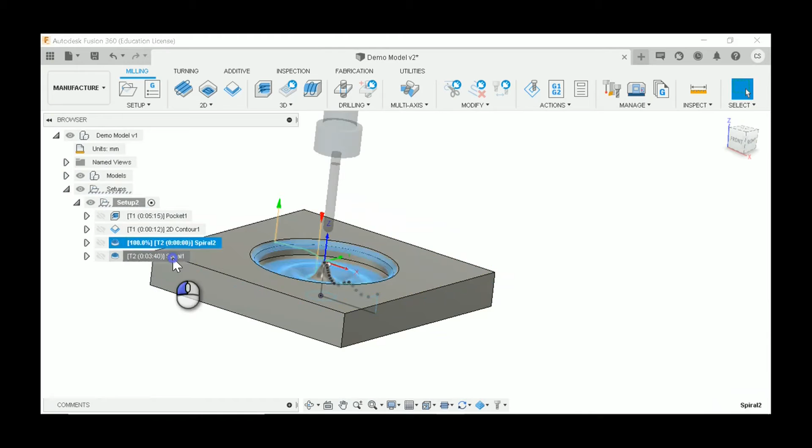There are probably ways you can set that height all at once by selecting them all, right click, compare and edit, and then just find the correct parameter and change it. But because we only have four operations, I'm just gonna do this one by one. Height. Again, this clearance is at 15. Drag it, that'll be okay. Lastly, edit height.

Okay, so I've dragged the clearance height of all four operations down. Actually, I didn't have to do the first two because the first two is T1, which I've already done. I should have just dragged the second two operations, but that's okay. So now we have to repost these two operations. Before, we clicked setup and post, but because we only want these two operations, select the first one, hold control, select the second one, and then click post.

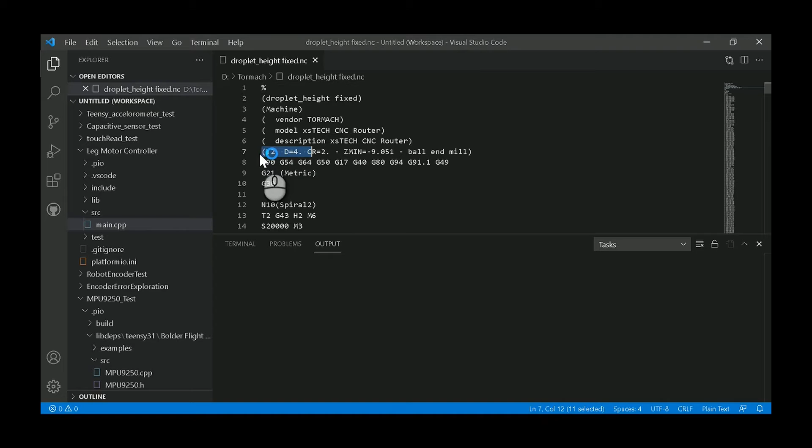I'll call it droplet height fixed, and then I'm gonna save it to the USB. Select, and everything else will be the same. The post is the PathPilot Tormach post. Post, and then save. Visual Studio Code is gonna show up. You can see this time in the bracket there's only T2, which is what we expect, because we're only posting the second two operations. Now I can close this, eject the USB, and go back to the machine.

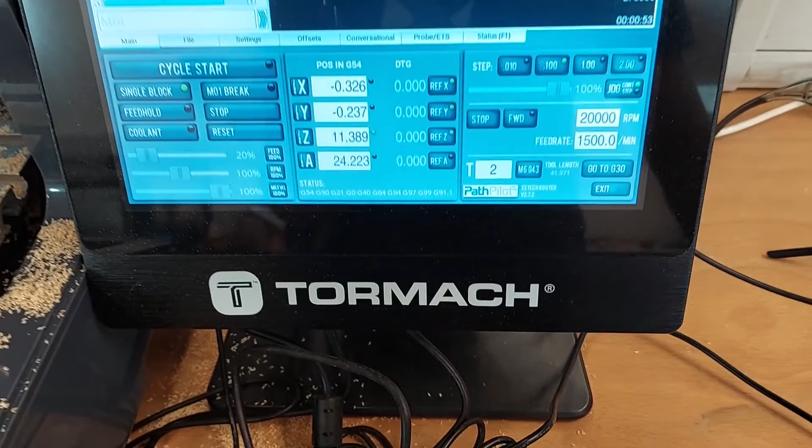So I have the USB with the fixed G code plugged into the controller, and now I will go back to the Files tab, go to Tormach, find the new G code, copy it over, find it on the left side, and then load G code again.

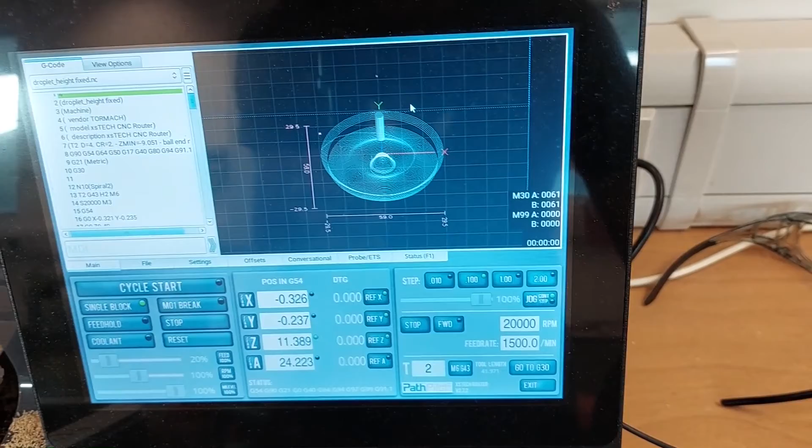Okay, so now it's only the code of the second two operations that we designed using the ball nose endmill. I don't have to set the tool lengths again, because I haven't changed the work coordinate system. The Z0 is still here, and the X and Y are still at the center. So I can just directly run the program now. And I would take out the ETS.

Again I would keep it as single block, and the feed override at 20%, and press cycle start. I'll stop single block because it looks okay, and then just cycle start. So now it has started that spiral toolpath down the cone. And now I'll change the feed rate override back to 100%.